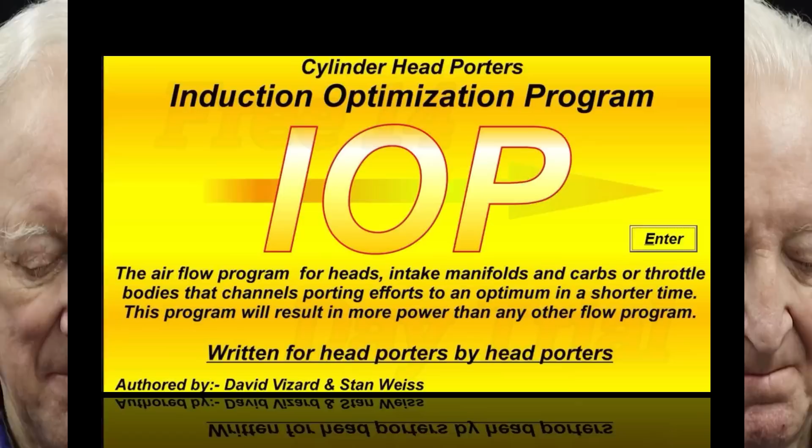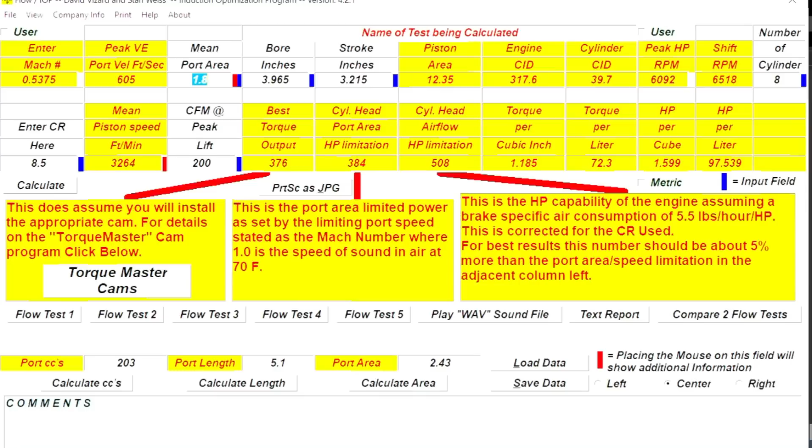Well, here we are, opening page. This is the program that Stan Weiss and I wrote some time ago now. Hit the enter button and it brings us to this page here. This is where we start entering the engine spec. Some of it only provisionally for now, but we'll go through that.

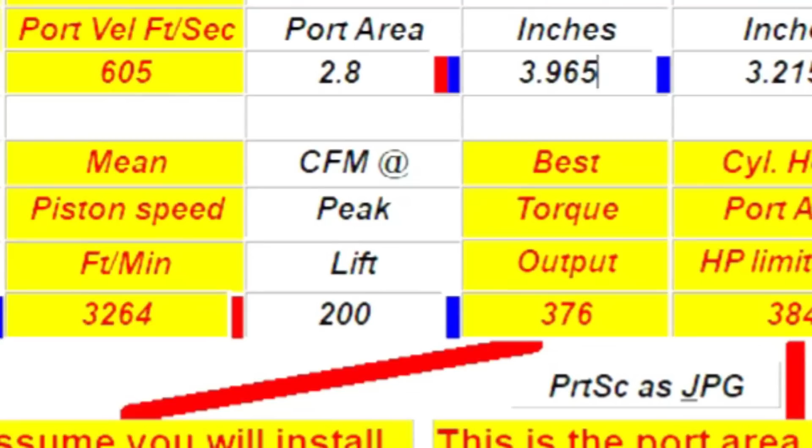First, the compression ratio. In our case, that's going to be 11.4. That's for the 408 that Eric is putting on the dyno for the test. Next, we go over and we put in such things as bore, stroke, and it's already got 8 cylinders entered.

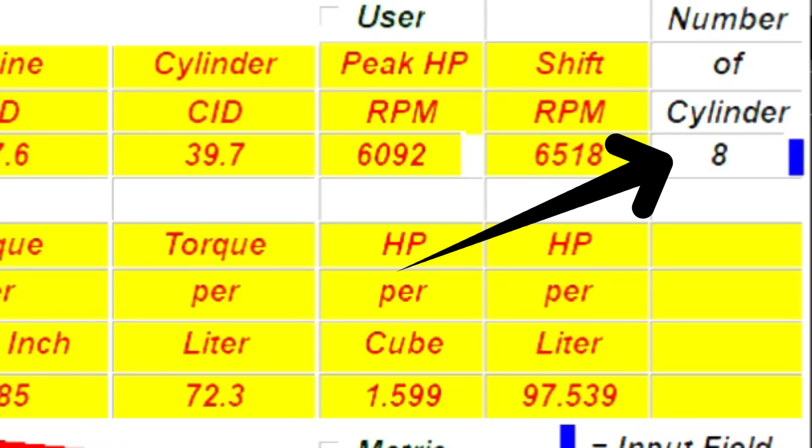We also put in provisionally the mean port area. I'm guessing that's about 2.8 square inches. And lastly, our flow at maximum lift. I know what that is from the numbers, and I'm putting in 340 provisionally.

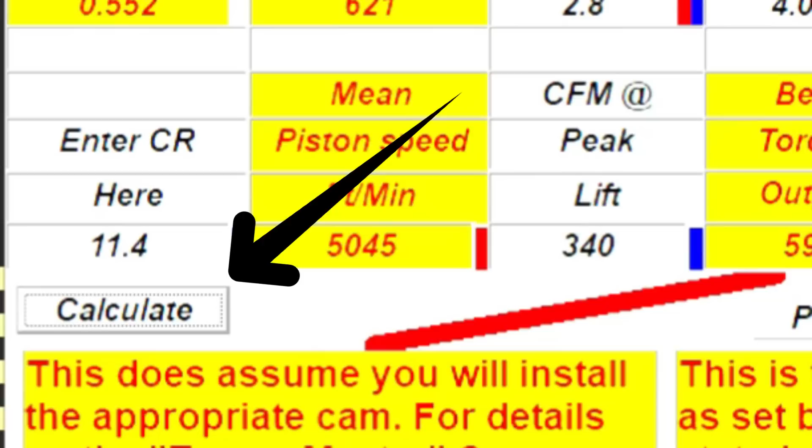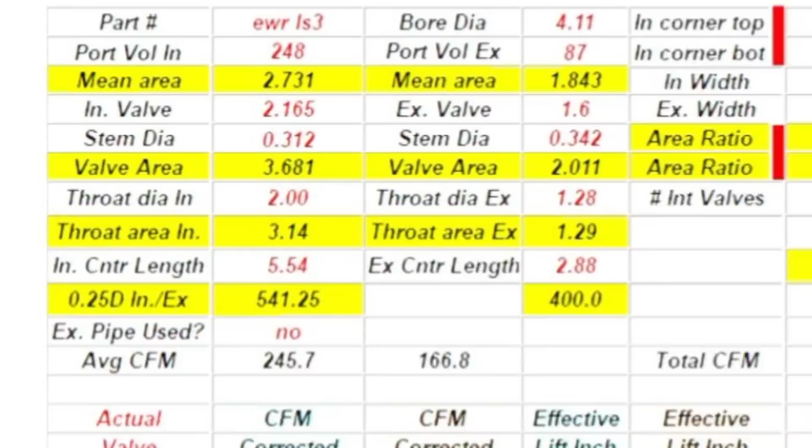Then we hit calculate, and then we move on to the next page by hitting the exit from this page. And that brings us to this page where we enter the data that I'm going to arrow here. Now that's very important, because without this data you will not get the full benefit of this program.

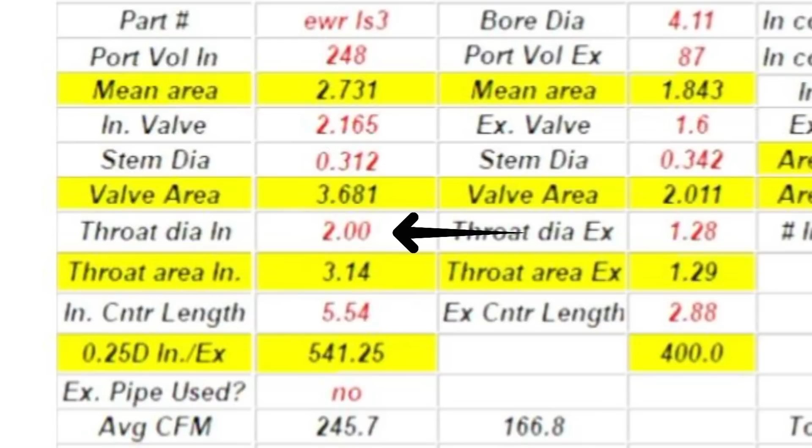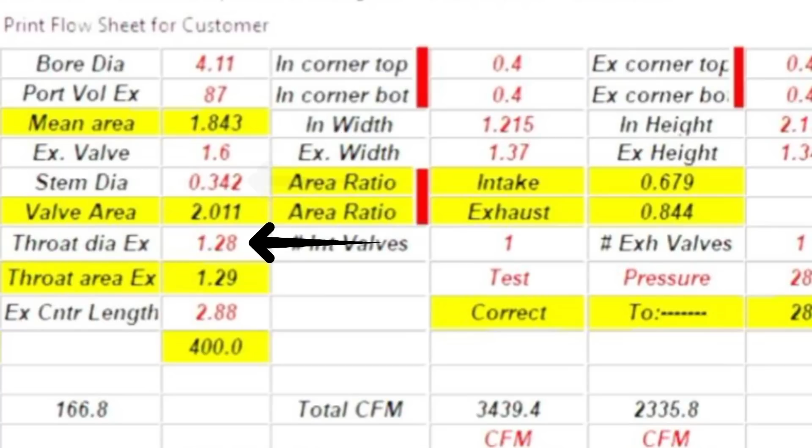So here we go. The first entries are pretty obvious. You'll need all this data, but we get to a point where there's some stuff that most programs don't take into account. That is the dimensions of the port at whatever strategic point you think you want them.

In this, we see we have the intake top corner, intake bottom corner, etc., width, and the program automatically calculates the area. Also, and this is something it does, is calculate how close you are to the theoretical optimum area of the port to area of the valve. Pretty slick stuff.

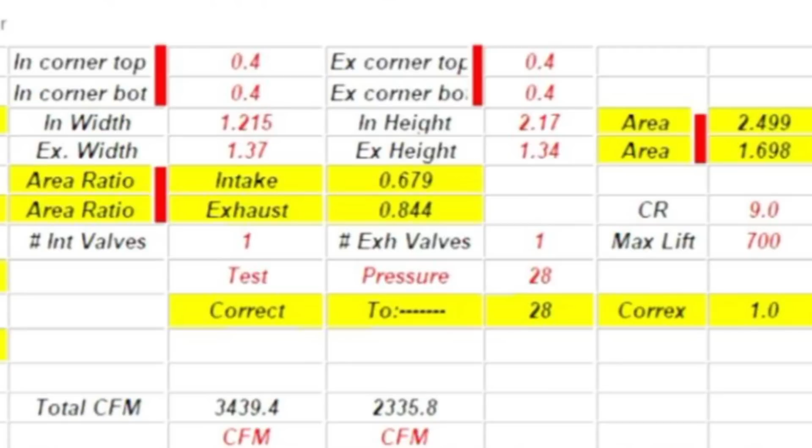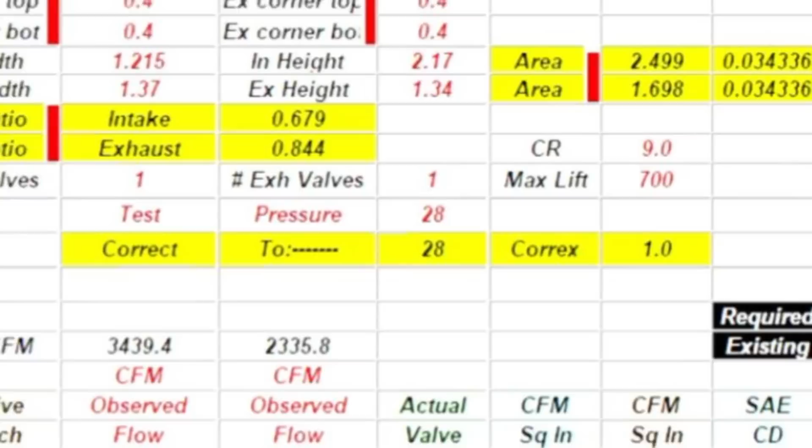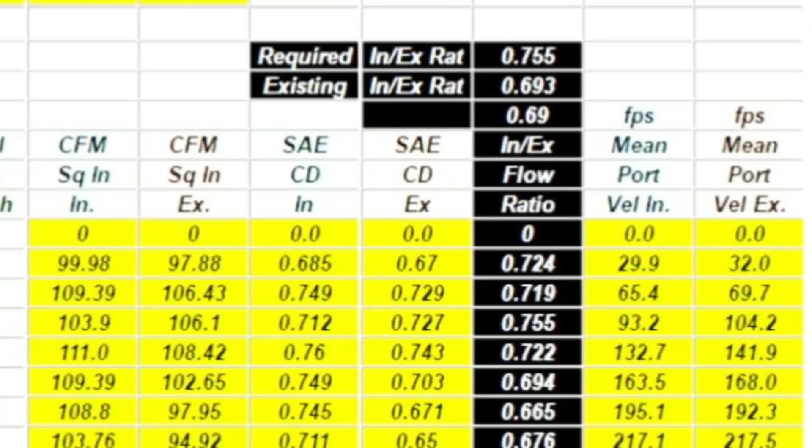It also calculates from the data I've just indicated here exactly what your intake to exhaust flow ratio should be. That 75% that people keep quoting is only right at about 9:1 compression. Before that and after that, it's not right. Just be aware of that.

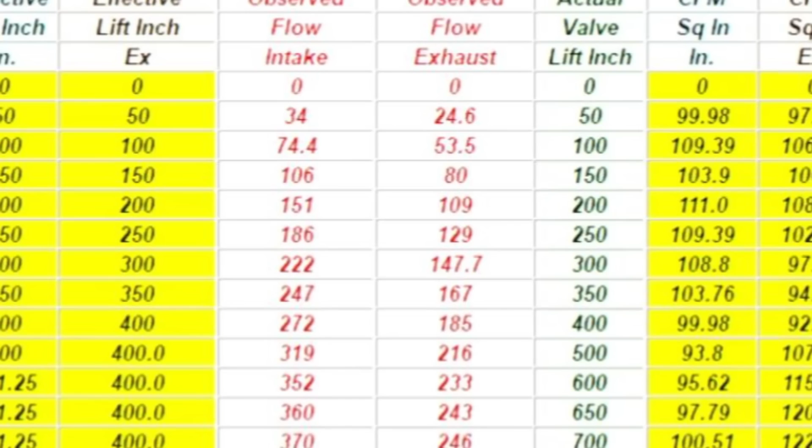Over here, we have in red the columns where you enter the flow. Now we're doing this at 28 inches, so we put in the relevant box that we want it corrected to 28 inches, whatever it may be.

In the 2 yellow columns on the left, we have the corrected flow for the intake and exhaust. As I've said, we corrected our figures to the normally used 28 inches.

The 2 columns on the right, effective lift, are the amount of lift that you can see before the actual valve size becomes the limiting factor. For SAE figures, we don't use the hole underneath the valve, we use the valve diameter.

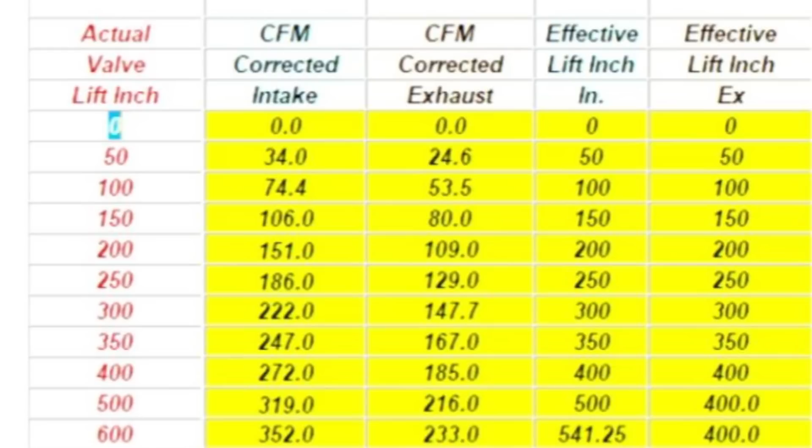This is used for the calculations of the discharge coefficient. I won't go into the details why that is done. Maybe when I get onto a cylinder head and flow bench only deal, I'll do that. But for now, understand that when discharge coefficients are calculated, they are calculated for that number shown in the column that changes to a usually odd number. And this always occurs at 0.25 times the valve diameter.

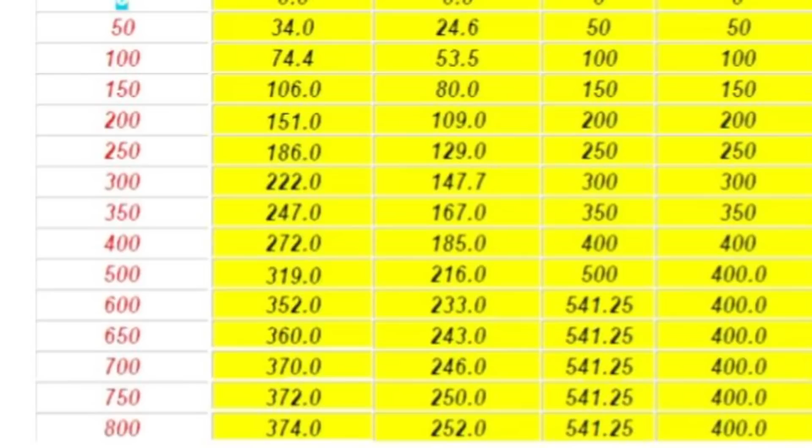Scanning down these corrected numbers, we can see before we take another step that the flow figures were pretty good. But it's going to take some graphs to see where we've gone and where it's possible to go with these heads. So here's the first graph.

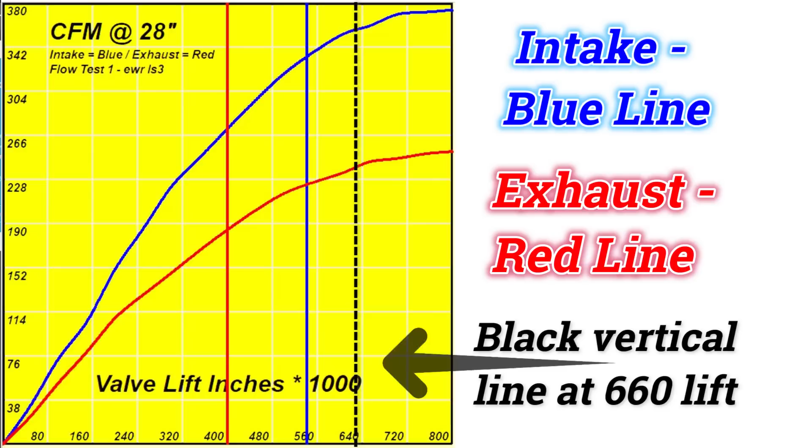The black dotted line here is the valve lift we have to work with. As you can see, it crosses our flow curves at some pretty good flow figures. Intake 364 CFM, exhaust 246. That is way more than you get from a typical 23-degree Chevy head by a bunch. And remember, this is only one of Eric's basic porting jobs.

Let's deal with the exhaust first. As we follow it across the graph, it comes down and curves at the inflection point, which takes place at 0.25D. Fairly typical characteristic there, but when it reaches the 0.25D mark, it takes off. The port gets more and more efficient and reaches a very effective 88% efficient - way above what normal ports achieve. Typical numbers are around 75%, so Eric's port has done very well. A line like that indicates that the port itself, when unencumbered by the presence of the valve head, really takes off, meaning the port shape is very well done.

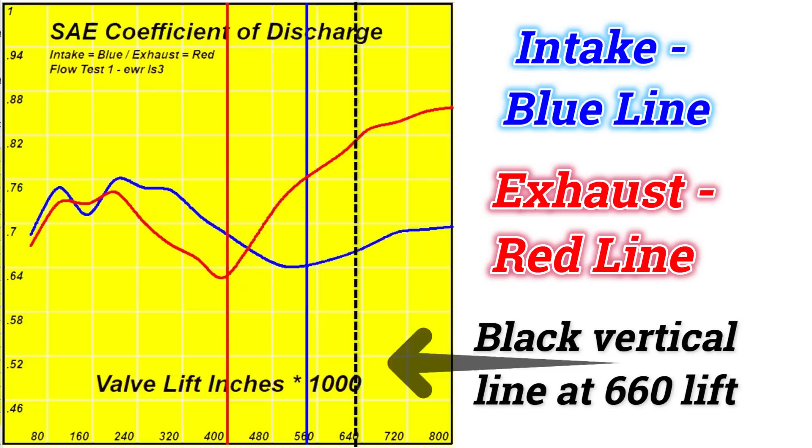Of course, we have to wonder whether this high flow lift capability has been brought about by a port which may just be too big. So the next thing we need to analyze is what mean port speed gets to at maximum lift. The optimum number at peak valve lift for port velocity, as dictated by this program, is between 300 and 320. As we see at peak valve lift, both ports are running around about 314 feet per second - just right for a good torquey output from a street motor.

Well, everything's looking pretty good so far, but we've got one more parameter to check. This is a very telling one because it gives us a clue as to how good the head is compared with anything else out there - that is the port energy density per foot length of port. So here it is.

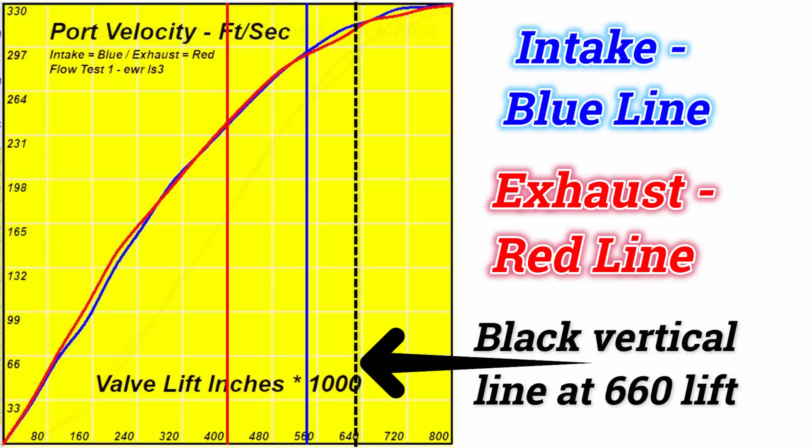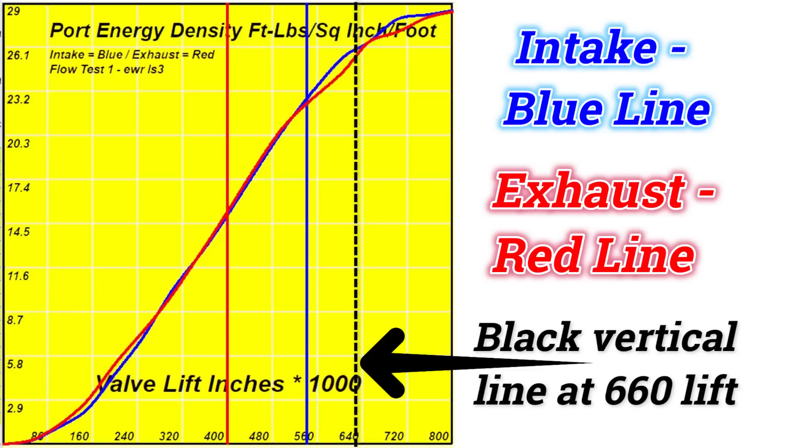Okay, time to make a summary here. Is Eric any good at porting heads? If this is a typical example of his work, he's well above average. Now, is he the only good guy on my list of head porters? No, I've made mention from time to time of one or two others, but one I really want to turn my attention to, because I don't believe I've mentioned him in the last 2 years of doing these videos, is Spears Racing Heads. I've used some heads, dynoed some heads a couple of times, and they worked out well. He's also had his cylinder heads on engines for the Engine Masters Challenge, and I believe the engines concerned did well, winning a Pontiac engine category. Anyway, that's all I've got to say on Eric's heads for the moment.

Those of you who are going to enter the cam shootout now have some graphs of the cylinder head's properties. You should have everything here that you need to produce a good cam.